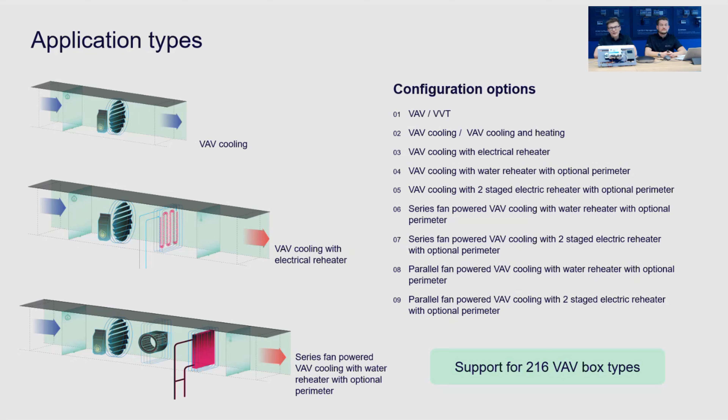So you need to know what exactly we can support and what is achievable with our controller. To do this, you need to find the place where we provide all that information. This is our knowledge base, which we presented last time, where you can find all the application algorithms, application variants, and the full description of the configuration.

The next step is to configure the VAV14-IP application. Just to remind you, and for the new people, we've got 4 different ways of configuration. The first one is using the DIP switches. Using the DIP switches, you can select the basic settings. You can select the reheater, activate the heating system, and select if you have a fan in your application. You can also set the units, and this is all that you can do, the basic configuration of the VAV types using the DIP switches.

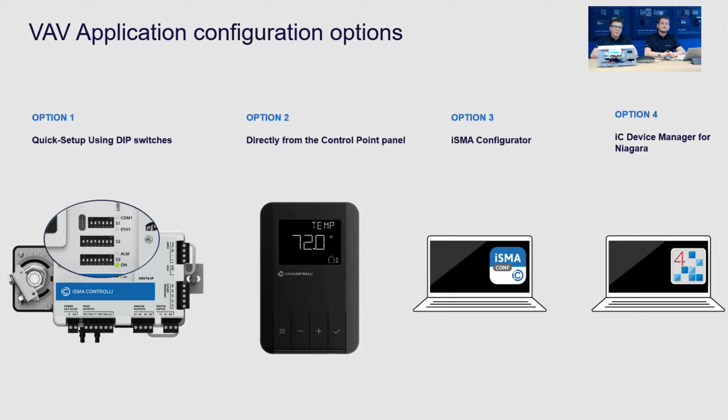More advanced, but also very simple and very easy to do, is to configure the VAV box using the dedicated CP-VAV control point panel. The next two are done using a PC or laptop, so we can do it remotely, and we provide 2 different ways. The first one uses the free of charge ISMA configurator tool. And the second one is for Niagara users. We provide a dedicated service, IC Device Manager, where you can do the configuration, balancing, and the flow settings on the VAV controller.

The next step is setting the IP addresses. We also provide dedicated tools, a dedicated view to manage the IP address, because by default, the VAV14-IP comes with our default static IP. If you do the commissioning and you probably have more than one on site, you need to set the IP and assign it to the correct space. To do this very quickly, we have the IP manager. This is the dedicated view in our IC tool, where you can activate or deactivate the DHCP mode, or set the IP address for all discovered devices available on site.

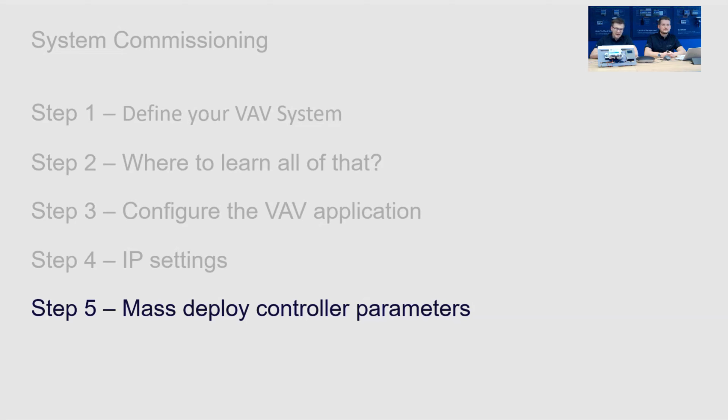The next part is to deploy the parameters to your controllers on site. And for this it is the same as the configuration. You can do it remotely, and you can use the ISMA configurator and its iC Device Manager dedicated service in Niagara.

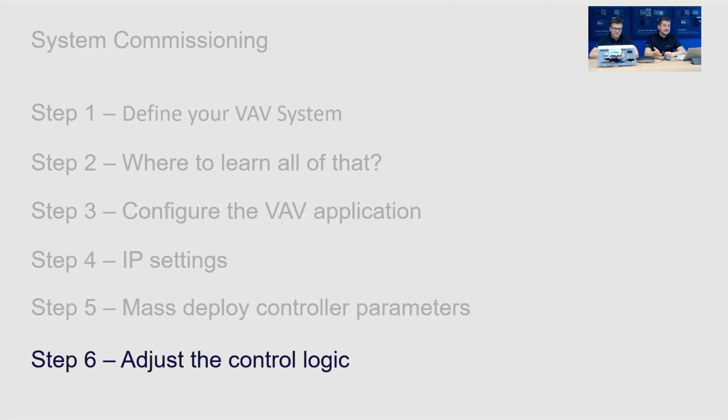And last but not least, an optional step: adjusting the control logic inside the controller. So the sixth step is the major part of today's presentation. We'll focus on that. And it's only available thanks to the onboard embedded NanoEdge engine, which is our software platform that will allow you to modify and expand the application.

So let's start with the very basics. Our NanoEdge engine is freely programmable. We have two dedicated tools, Niagara Workbench and iC Tool. Inside the Niagara Workbench, we have a special extension you need to download, which is called AnyToolLink. You can also use our iC Tool, which already includes the proper module to do the programming. The system is cycle-driven and can store multiple applications.

We are native with Modbus and BACnet protocols, and all the data in the controller can be exposed over those protocols automatically without any actual work needed on the programming level. The system is modular. Our NanoEdge engine inside the VAV14-IP utilizes only the required modules, the required libraries. And if you would like to take advantage of other features, like trends, which are supported in our latest 1.8 version of NanoEdge OS, you can just freely install this library and start working with trends. It is license-free. There is no license stored on this controller.

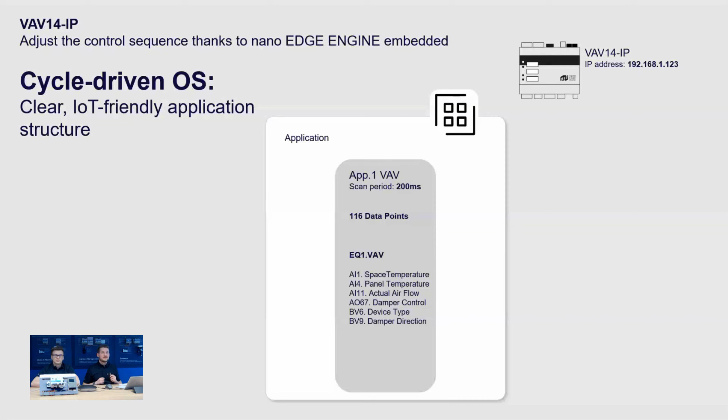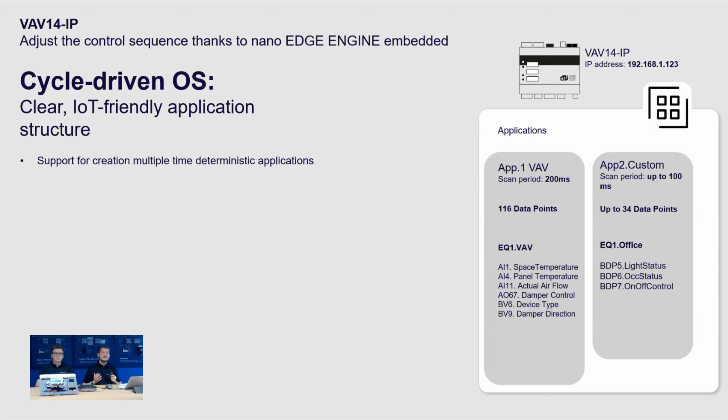So let's now look at the actual application inside the VAV controller from the NanoEdge engine system perspective. There's one application built into the VAV, but as I mentioned, we can build multiple time-deterministic applications inside the VAV controller. So let's have a second application and call it a custom application. We can run both simultaneously on a single controller, and those applications can run independently in their own time cycle, per the application requirements.

So the built-in VAV application scan period is set at 200 milliseconds. For the custom application, the scan period can be lowered to 100 milliseconds, but of course, per the application requirements, it can be set at 1 second, 10 seconds, or even 60 seconds, just to save some memory capacity on the controller. But it's up to the application and the engineer of the application to decide on the scan periods.

In the application container, the components that can be used, stored, copied, and utilized are equipments, folders, data points, and all the logic that we'll build inside those containers. And what is the capacity of the custom application if you decide to build one, or second and third apps?

The total capacity of the VAV controller is 150 data points, and our built-in application utilizes 116 data points of the total capacity, which means 34 data points are available for any custom application or expansion of the built-in application. So it can be another custom app, or two custom applications where we divide 14 data points for the first one and 20 for the other one. Or we can just build on top of the first one. It's a really programmable environment, and we give all of those options to the engineers to take advantage of them and build a better system for the customers.

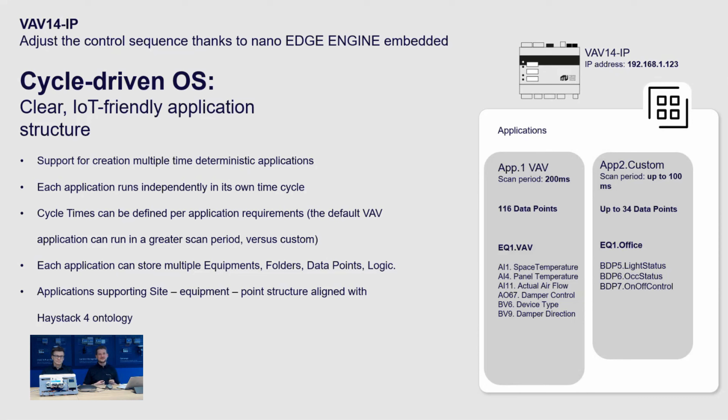And if you look at the supported functions of NanoEdge engine, next to the free programmability and next to the expandability with libraries, we support different protocols. So you're able to integrate over the onboard IP or RS485 port and expand the local I/O number over BACnet or integrate any network equipment.

We support BACnet as a client and server on both MSTP and IP layer. That means that the VAV14-IP can be even visible on the MSTP layer if the user decides to wire the application as such. Moreover, we support Modbus RTU and Modbus TCP/IP as both client and the server, which means you can integrate network actuators, energy meters, or our I/O modules.

As you may know, our I/O modules are multi-protocol and support both Modbus and BACnet protocols. So all of that equipment can be integrated over Modbus RTU or IP. Additionally, we also support a Modbus TCP/IP to Modbus RTU gateway function, which means next to the integration, all the Modbus RTU devices can be transparently viewed in the supervisory software on the VAV14-IP IP address, thanks to this transparent gateway function.

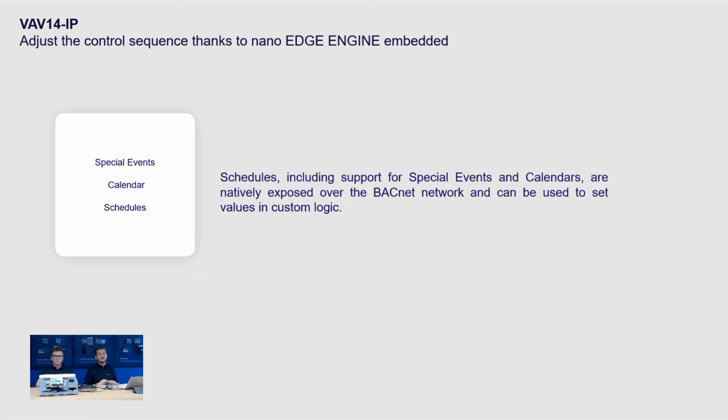What's more, we support schedules. And the schedules include support for the special events and calendars, which are, again, natively exposed over the BACnet network, which means any custom logic that is being built inside the controller can take advantage of those special events to set the values locally and be later synchronized with the supervisory software to set them over, for example, Niagara Workbench. And last but not least, the latest function that has been added to the nano EDGE ENGINE OS 1.8 are trends.

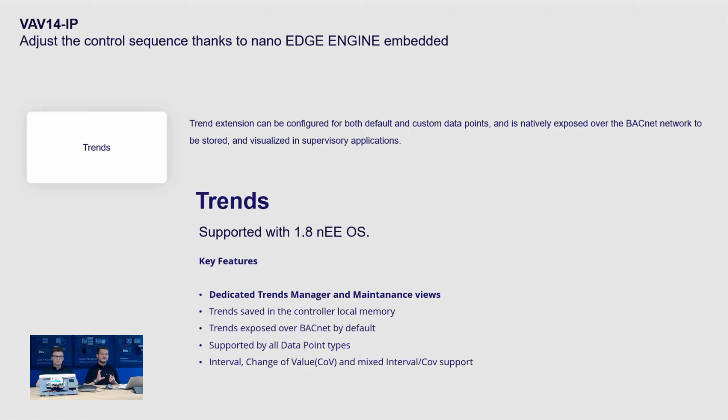The trends, when configured on the controller, are supported on any data point available already in the system, which means the default application can also take advantage of that. But as well, all the custom data points added to the system can be enabled with the trend extension. The trend extension is also available and exposed over BACnet network to be stored and visualized in the supervisory applications. In our nano EDGE ENGINE OS, we support interval, change of value, as well as a mixed interval COV support on the trend log data. And now the main topic, which is customizing the controller logic.

So today we are going to not only go inside the PowerPoint presentation, but we are going to make some changes in the logic. By default, VAV14-IP application supports connection of one dedicated space sensor. We have a control point panel, which can be connected using a dedicated smart plug socket, which transfers communication and power supply using one cable. This is the capabilities of the default application.

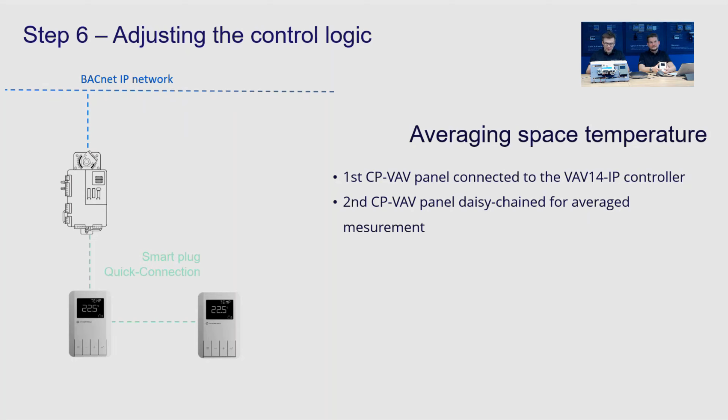So today we are going to connect the second CP-VAV panel. We are going to daisy chain it with the first one, and we will do the measurement of the temperature in the two different spaces, and calculate an average. To do this, we need to know some basic information about the VAV14-IP, the default IP address. We need to know the default credentials. So the VAV14-IP comes with the application inside. So those are the credentials.

And we need to have at least one of those three tools. We can use the iC Workbench, or we can use any Niagara Workbench, but we need to put the tooling modules inside, or we can use the free of charge iC Tool. Today, I'm going to make a live demo on our iC Workbench station, which contains all of our iSMA modules inside, so we don't have to install any tooling modules.

So let's go inside our iC Workbench, and by default, you can find the newest AnyTooling version, which also has the dedicated service. So we can connect to the station that we have in our PC, and we can go inside the services and find the AnyTooling service.

So you can see that I've got two devices, two rows in my AnyTooling service. The first one is not a physical device, but this is the way that we can make a USB connection. So we can connect to any Nano Engine controllers, VAV14-IP or BACnet also, using the USB cable. And we can see all the controllers in our BACnet drivers, BACnet station, with the Nano Engine, with added AnyTooling

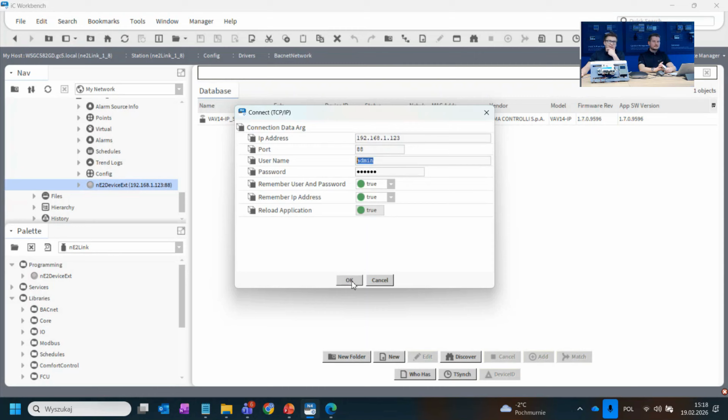Right now, we are going to read all the information from the VAV14-IP. So the AnyTooling activates a connection which allows us to read everything from the controllers: the libraries, Nano Engine version, schema, and the tree. So everything is kept inside the controller, and once the connection is established, the LED changes the color from yellow to green, and then the tree appears. So we can see what is inside the controller right now. So we can do the programming.

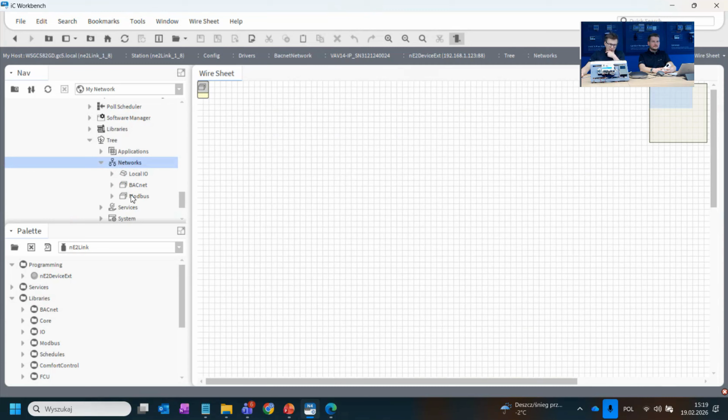We will start the programming with adding the second panel. So we will go below the network and we will open the BACnet network. And we will make a quick discover of the devices. So you can see that my first CP-VAV panel, which is just next to the VAV controller, has the status OK, but the second one is still unplugged.

So we can make a BACnet discover of the devices to check how many devices we've got on our network. And once the CP-VAV panel is connected, we will find the panel. So the connection we are going to do now is an RJ45 cable, which is actually connected directly to another CP panel. We call it smart plug. On every control point panel, we have two RJ45 ports.

Once the cable is connected, we will see that the CP panel is powered up, and we can actually see all the values, and it simultaneously shares the communication data. So the status now changed from down to OK. Exactly.

And remember, in the scope of today's webinar, we wanted to read the temperature sensor, so the temperature value. So I've already added it to speed up and not waste your time, but we also can discover all those 248 BACnet objects in the CP-VAV panel, because the CP is a very universal wall panel that you can customize for your needs. You can do the commissioning, balancing, and the flow setting from those panels, and everything is available from the BACnet network.

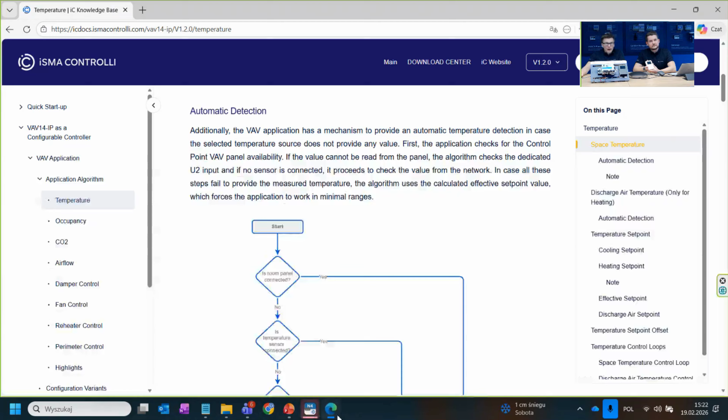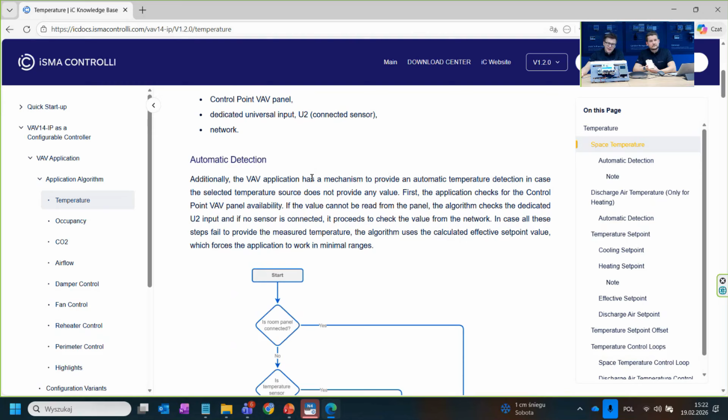And if you want to learn about the algorithm and logic inside, I recommend visiting the ICDocs knowledge base, where you can find the description of each folder. So you can find, for example, the temperature folder. The temperature algorithm is described over there. We describe what can be the space temperature sensor, how the measurement works, and we also implement some advanced automatic detection of the available temperature sensor. We provide dedicated diagrams of how the algorithm works, and all of the folders inside the diagram have their own description on our knowledge base.

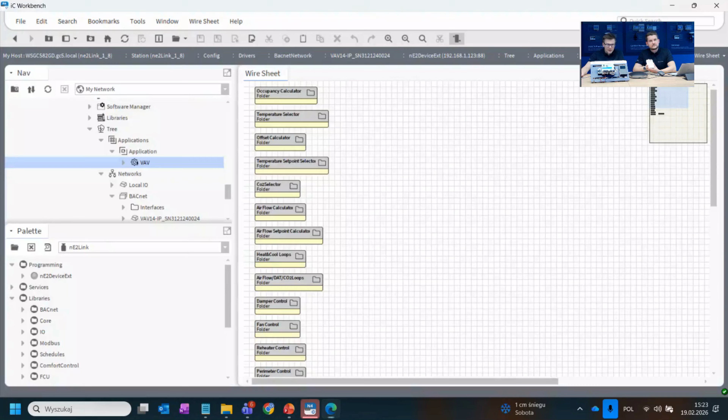So let's go back to the temperature selector folder. And what we need to do right now is add the second temperature sensor. We need to add the data point. So just click the right mouse button and add the analog data point. Let's name it second panel temperature, because the first one we've got over there. And now we need to make a link between the network point, so the BACnet object from the CP panel, to the analog data point.

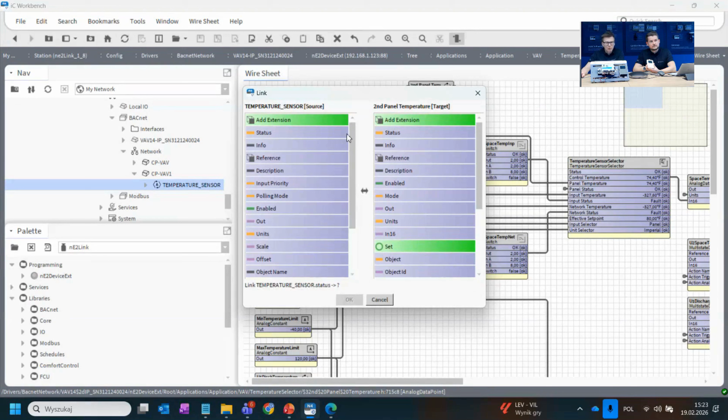So we need to go below network, click right mouse button, link mark, and click on the components on our wire sheet, so on the data points on the wire sheet, link from. And now we've got the window to make a linking. This time, because we've got nano exchanging inside, we are going to use the reference slot for the linking, because it transfers not only the value, but also the status of the data points and network points.

So in case we will have some problem with communication, we will see the information directly on the data point. We don't have to go below the network and see what's wrong with the network point. And it's all real time, right? And it's all real time, exactly. So there's no compiling. You don't need to save the application. You just change your application, adjust the logic, and it's all saved directly in the controller. It's all done on the controller on the fly.

What's next we should do? We need to find a dedicated component which calculates the average. We can also do some mathematics, but we've got the dedicated components. So let's go inside the math library and find the average component. So we need to drag and drop it. And then we need to make a link.

Right now, by default, the first panel temperature from the first CP panel is connected using the link to the temperature selector. We don't want to have this measurement, so we need to delete this link. Then we need to connect the output from this first panel to the input A into our average component.

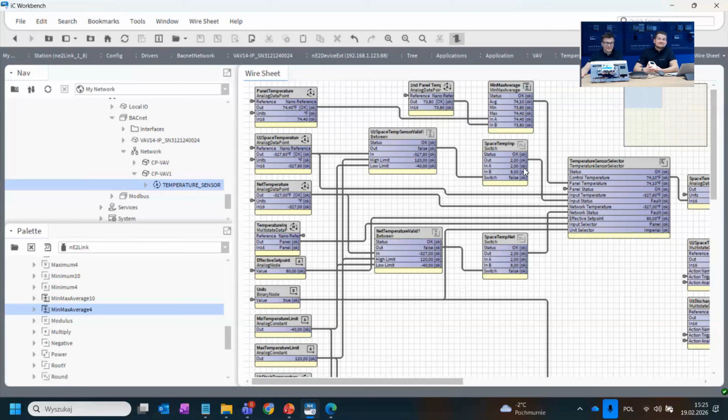To input B, we will connect the input from the second CP panel. And on the output, we've got the average. So the output we can connect to the input of the temperature sensor selector. And that's all. So that's the averaging. Wow, that looked easy. I'm impressed, Tomasz, with that live demo.